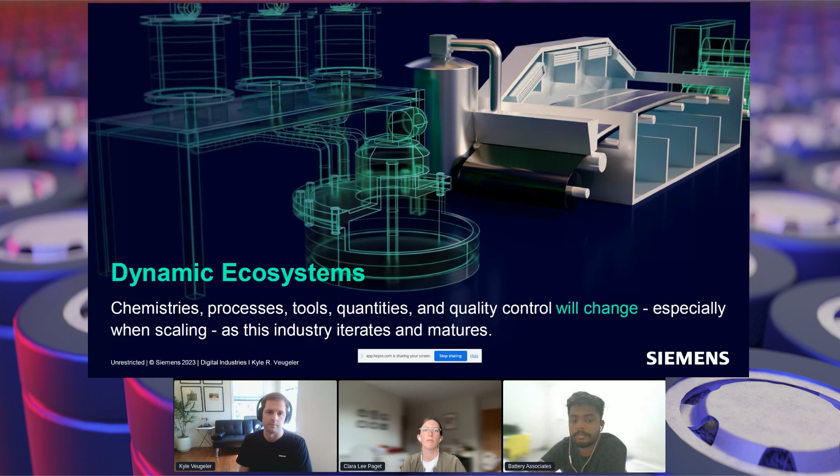First, I want to talk about dynamic ecosystems. The one thing to note is things will change. On my deployments of cell manufacturing lines, I've gone through many, many recipes, many chemistries on what that looks like and what it needs to accommodate. And I don't see that changing for the foreseeable future in the near term. So how can you handle that? That will be an important hallmark of what we'll talk about today.

The number one thing in terms of stressors on your manufacturing engineers and your commissioning team is going to be the rapid scaling of a lot of brilliant people putting together a process, maybe a PhD holder, 20 people. It is a great process. Turning that and getting funding over the next 2 years into a massive, highly orchestrated workforce is incredibly difficult.

With this multi-sourcing of tooling, I have yet to find one person or one company that can supply every single tool in cell manufacturing. You will be working with many different stakeholders, many different automation platforms, and getting them to play together is honestly an art form in and of itself.

Second with that is scale-up issues. So being able to simulate virtually or doing certain, we'll call engineering tactics ahead of time, is far more beneficial than we're just going to run this machine at different speeds, different rates, different deposit factors, and find out what our optimal cycle time or optimal rate is. Being able to do that is incredibly important, especially with an electrode.

On anode, not so much. Graphite's pretty cheap. When you come to lithium, you're scrapping material that's quite expensive, and being able to do this is great for your OpEx and CapEx expenditures moving forward.

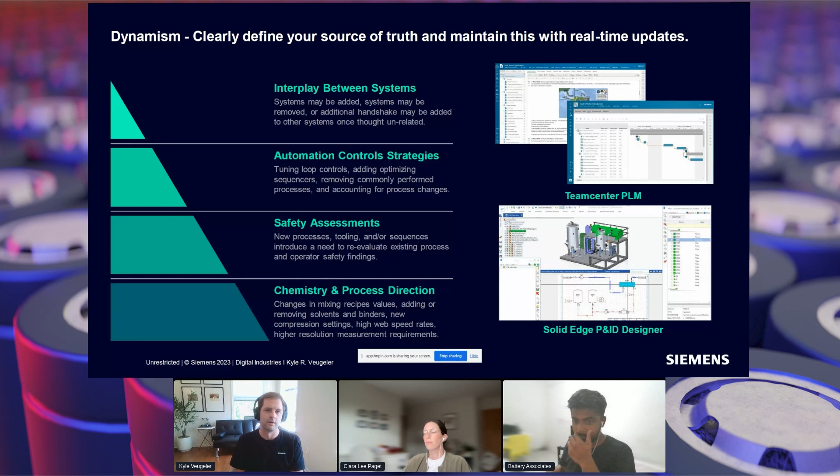But being able to have a product lifecycle management tool to document, these are my throughput rates, this is my control narrative, this is my overall design for my system and my process and instrumentation diagram. Without this, it is an act of masochism, if you will. You have to have your teams work together off a single source of truth. That's what I want to drive home here. And this is how I want to depict that.

Typically what you will see is most people talk about agile, and being able to do agile development of these systems, most teams just skip steps. That's how they actually create agile systems. In order to effectively do this without just skipping steps, you need your engineers or all your key stakeholders working on the deployment of that pilot line, mass production line, to work directly with your lab or your early process engineering teams.

Without that, which I draw over here, is the waterfall telephone game. It will take too long with all these changes to come to you to be able to react in most cases. You're already 2 versions behind by the time it gets to you. Being a tight-knit team, specifically for a controls engineer, you become best friends with process engineering, with your lab output of what they're doing on the coin cell validation,

how that might affect you. And then as an effective controls engineer, knowing, okay, they're removing the binder, therefore I'm turning off all these different systems and I have to change all my routing. How's that going to affect my quality metrics? I have to turn off a bunch of alarms. How do I properly display that on the UI for operations and seeing their feedback, as well as turning off systems with facility that we no longer need to hold up a process if it's not operational?

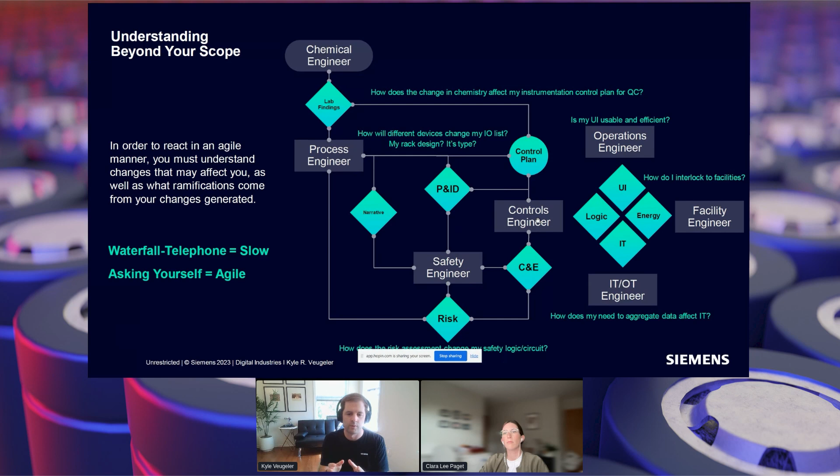That is the number one thing you have to instill upon your workforce: being very collaborative, single source of truth, know what is coming from above them, as well as their decisions and the ramifications created from those teams.

Here, I'm going to skip over it for the sake of time, but these are some of the key stakeholders you'll see on these manufacturing deployments, and they all tend to work straight from what's coming out of the lab. What are the core quality metrics? What is the core process or throughput rate? What are the safety concerns involved with this automation?

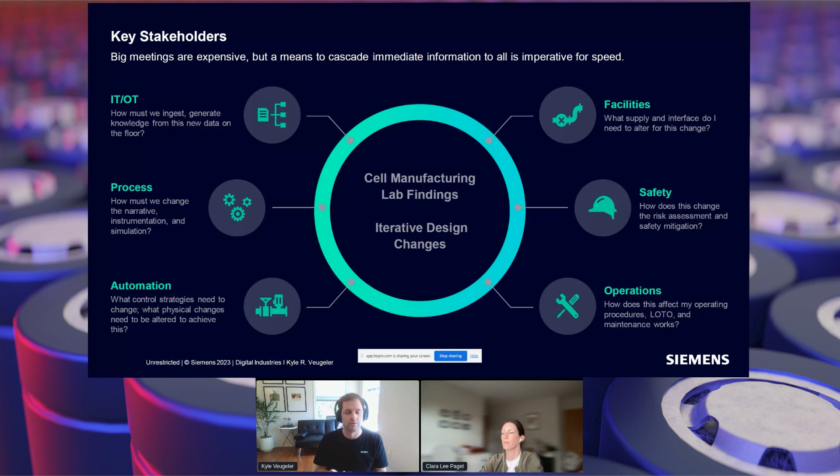Here I want to draw a depiction for what this looks like in reality. In most cases, people tend to view battery manufacturing as these individual tools on the floor. Yes, they have safety. Yes, they need to talk together to have a highly efficient system, but they're also extremely reliant on upstream, we'll call it the old adage of facilities automation.

An example of this, in mixing, for example, when you have a dry process or pre-slurry wet process, you are moving almost explosive dusts with a vacuum or a system here, and having an aspiration system that's typically controlled by facilities is incredibly important. You're not going to move that material unless you have an okay or a good to go from dust collection systems, aspiration systems.

On the contrary to that, you might have chilled water. If you're doing a massive mixer, you might need to cool the jacket of that mixer. And if you don't have the proper temperature of that water, yes, it's a bad batch, but you're not going to hurt anyone.

To turn that again on itself, when you're doing coating, you might have a defoaming agent or a solvent recovery system that has maybe an ammonia abatement system. You need to work with facilities to make sure that the damper for that abatement system is open. You cannot run that machine without that.

So controls and manufacturing automation engineers in general: high integration with the process team, high integration with your facilities automation team, commonly overlooked. And then the last one is something like fire suppression. You're not going to charge and discharge without active fire suppression in your formation and aging rooms.

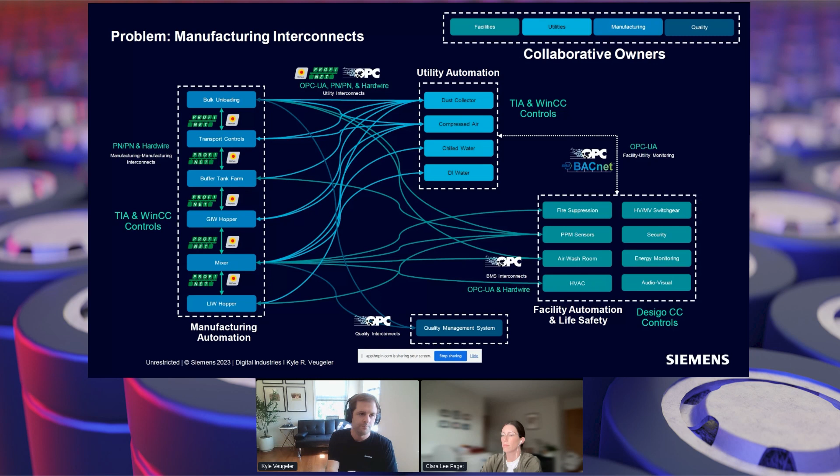I want to talk about next aggressive ramping and scaling and what that looks like in practice. Most of you may already know this or intuit this just by your understanding of the industry, but I want to drive a few things home.

So in a pilot line, typically your automation scope is a factor of 12, 20 less than what you would see for mass production. You are incredibly reliant on an OEM tool builder because you don't know what you don't know just yet. Unless you're extremely vertically integrated and somehow you've already done this without doing it the first time, you will be very reliant on your OEM tool builders, their best practices, their quality metrics, their preferred software automation of their tooling. Your process definition is in the early stages of, yes, we think this is our optimal process, but you are about to learn far more.

Tool interconnectedness, you can manually transfer material on a small sub 1 gigawatt facility. When you get to mass production, that really gets upended. And they don't really need to talk to each other. You're still in a pilot line. The data throughput, yes, you're doing quality metrics, but you're not doing massive data ingestion at this point in time.

And then also time to commission, you're learning the first time how to commission these systems. Some of these might be, I don't know, we'll call it 10 meters tall, 100 meters long. With this, you don't just FAT this at a customer site and build it and ship it here. You tend to stick build them in some cases, especially in electrode for these massive machines.

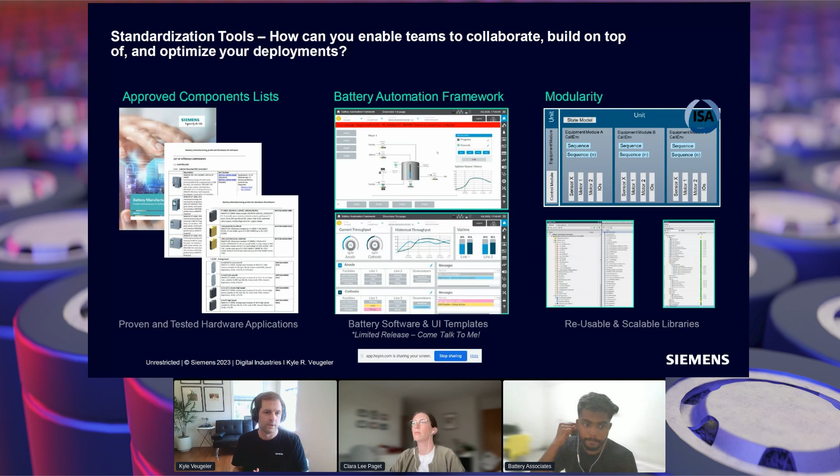Using modularity in your code development is really big in terms of, I want to do 1 gigawatt, I'm going to expand to 10 and then to 100. All of that capital investment you're laying down, you want to be able to reuse that and iterate upon it and build upon it. So how can you do your software development in a modular fashion to not reinvent the wheel for every production line?

Within Siemens, extensive understanding of those. So like I said here, we have Opcenter, PLM, IoT. The list goes on for preventative maintenance and operations and manufacturing. Simulation, I'll touch upon in a second. A really big help in going from pilot to mass production, and a plethora of use cases that we can share that are non-NDA constrained. Templates for doing your due diligence ahead of time, templates for selecting the right hardware, doing your simulations, and then also in terms of connecting multiple different platforms to one aggregation system.

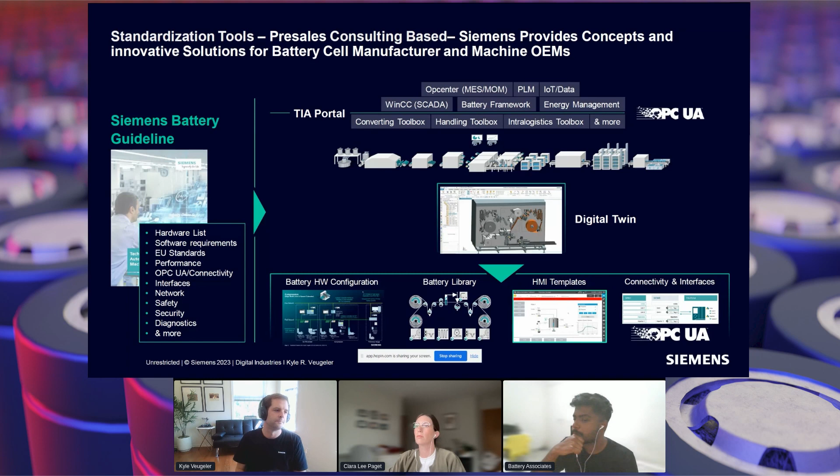I want to show you an example of maybe what modularity would look like in practice. So here is an extremely brief 10,000 foot view of what you might see in mixing, for example. You might see a PLC, you have some motion control, you have some load cells for your gain-in-weight, loss-in-weight into a dosing system or to a mixer. You also have a lot of process automation when it comes to that world, high analog, less digital.

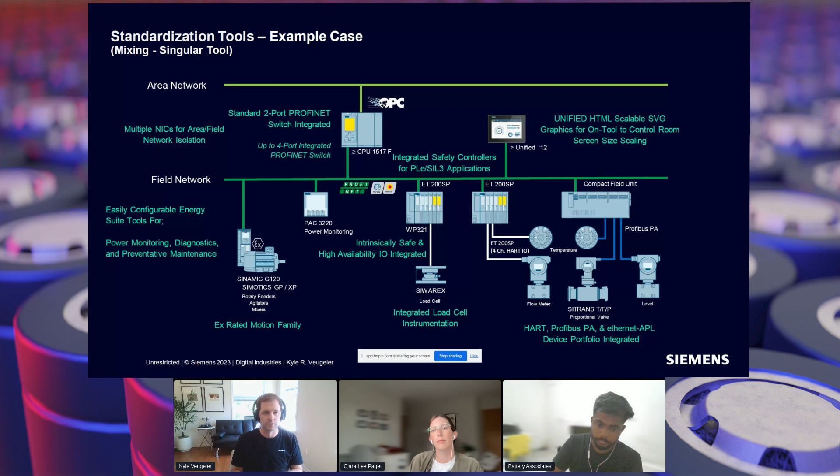The one thing to note here is a tool provider might only provide mixing, they might not provide coating. And then even if they do provide mixing, having a monolithic structure is a very big detriment, because if you want to service a portion of this or run a portion of it without the other portion, it's really good to know about hot swappable I/O, your span of control for your PLCs, and the modular nature for what you can reuse and use. And I'll show you more in a second on that.

The big thing right now, it is very hard to walk the walk and talk the talk on this, but people doing it are seeing massive dividends on what their work looks like. The modular production aspect.

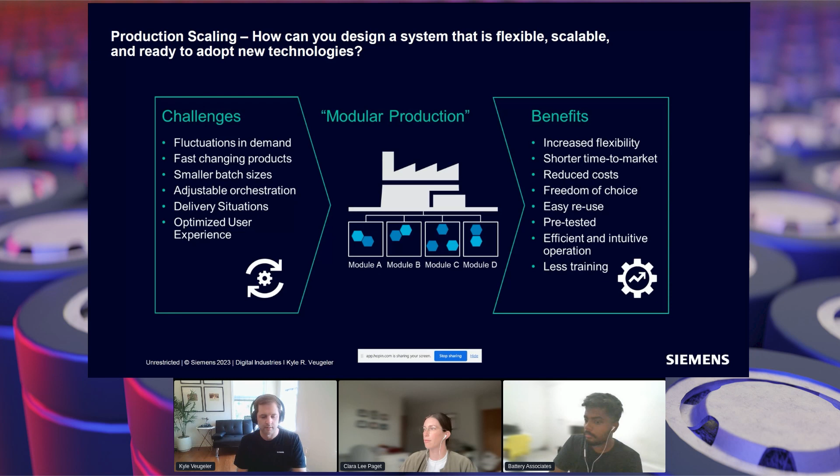Now, how does this help everyone in the industry? One, for manufacturers, it is really good to be able to have a modular system for A/B testing, for scaling for the future. Like, yes, this system worked, this system didn't. Go with this one. We're going to move that on. It's not one system tied together that you have to redesign.

Second, for line integrators, if you have multiple different platforms, multiple different parts of the world, how do you break them up in a modular fashion to interchange and swap them out? Also, for the end customer, it is a big help in terms of quick adaptation for changes on the floor. You can change a certain portion of your system, not rewrite a bunch of code for massive monolithic structures.

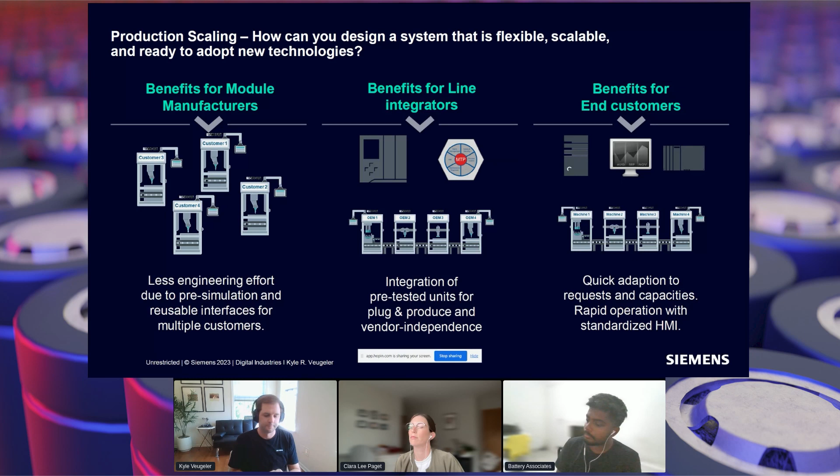Now, what does this look like in practice? This is what it would look like. So this is a subset of modular breakdown into mixing. You would see something like batch handling be on a separate control strategy from your mixer. The reason that it's helpful is you might have a new mixer one day, and I'll speak to this in a second, or you want to do maintenance on a mixer. You want to still be able to run production on your upstream.

You can take down one system, let maintenance do whatever you want, deploy new code. You're only affecting a portion of your operation. And being able to have multiple different control systems allows you to do that. If it's one, you're going to turn off, lock out, and the whole thing is down. You're sitting there waiting for them to apply them. Also, when you want to make a change on automation for mixing, you don't really want to expose risk to your upstream process that's been running really good.

As you start to scale, this becomes far more valuable. And what I mean by that is, based on my alma mater, when I would go into mass production, you will find the limiting factor of what OEM tool builders can build in a singular year. You're not buying one mixer, you're buying 90 mixers, and they're huge. They're 1,000 horsepower plus, 90 mixers.

You will find quickly that being able to adapt to 7 different suppliers to build you the exact same tool is incredibly hard. So having a modular code you can give them as a reference, or being able to own that within your own organization to say, give us the hardware, we'll write the software because we have to talk to everyone, that is a massive leg up when it comes to mass production adoption. Being able to source from multiple vendors to deliver the same tool because they can only build so many a year is a common, almost on every tool, problem that you're going to be seeing in the near future.

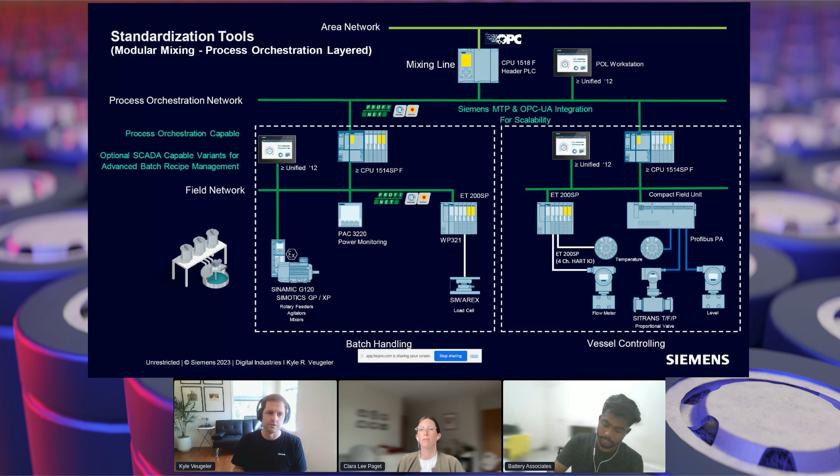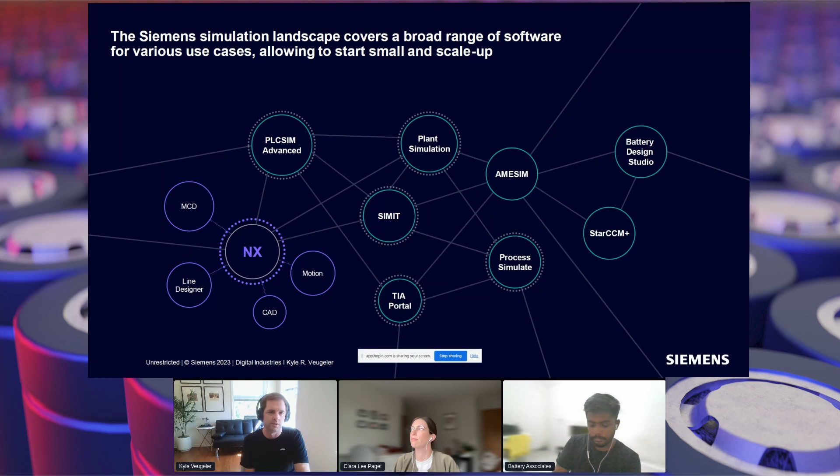Next, I want to talk about simulation real quick before we tie this up. I won't speak too much to this because this is a PDF and you can't see the fancy videos, but it's incredibly important for understanding what pilot to mass looks like for your roadmap. So within Siemens, we have a litany of software and simulation capabilities. I want to draw your attention to a few, and forgive me, you can't see all the fancy moving bits of this slide deck.

In mixing, you may see you need to do, we'll call it high speed vibration tests, and maybe why the blades on your mixer are vibrating and how can we effectively run this. You might just need to look at distribution within the mixer. Being able to simulate this is incredibly important.

As you step forward into coating, being able to coat and then check with maybe a thickness gauge on your web is great. Being able to simulate this with multi-physics ahead of time will save you massive amounts of lithium scrap as you run. You're not doing trials and measuring with closed loop control. You're actually virtually doing this with no cost to material or scrap rates as you ramp.

Same thing with calendering. That is a big portion of quality in cell manufacturing. Maintaining your electrode thickness, being able to simulate down to the actual particle physics of these systems, Siemens has done and will continue to do to support systems here.

As you get into more complex aspects of these systems, discrete element modeling, laminar resolve modeling, and slurry modeling, these become incredibly important for throughput calculations, incredibly important for why is my machine not running the way it's designed to, as well as simple changes like the moisture within a room will affect the particle physics of the powder or a slurry moving through a system. It might aggregate on the walls and kind of just go right through the middle. Being able to simulate your limiting factors and what can and cannot be done, very important.

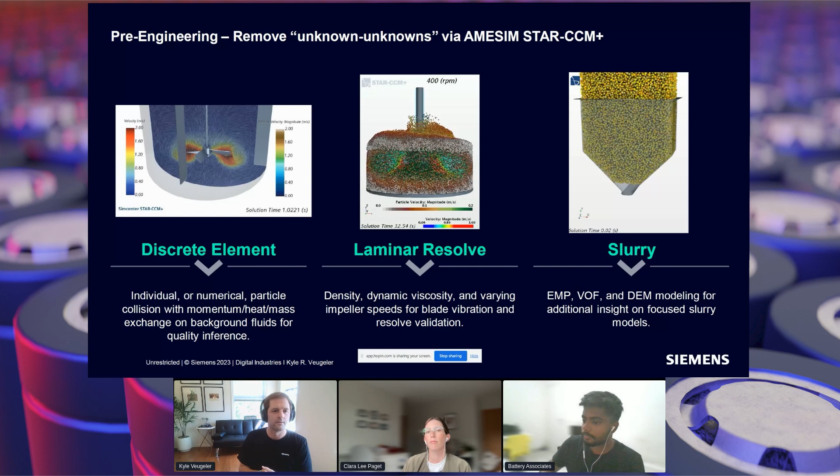The last one here, you really can't see too much because it's not an animation. After this, hopefully I can share my PowerPoint so you guys can all see this.

Being able to virtually simulate within Siemens your PLC runtime, your user interface, and then also its feedback for the simulation event, incredibly helpful. Yes, it is a lot of work to set up in the very beginning. I won't deny that. It is incredibly helpful for tool builders to do a virtual buy-off. Does my safety system work the way it is before a customer comes on site to buy my machine? Being able to see, if I add 10 more pallets to my line, what is my new throughput limiter? Where's my bottleneck now? Within Siemens, the capability tied directly to your PLC control environment to emulate a PLC, to emulate the multi-physics, to emulate the cause and effect responses, incredibly helpful.

The last thing you want to do is have 10 engineers from an end customer standing on your floor to do a buy-off. You could have done that ahead of time. They're just going to tear you apart for nitpicky labels and colors and things like this on your tool. Being able to do this, incredibly helpful.

Kyle, actually, 2 more minutes to conclude. Sorry to disturb you.

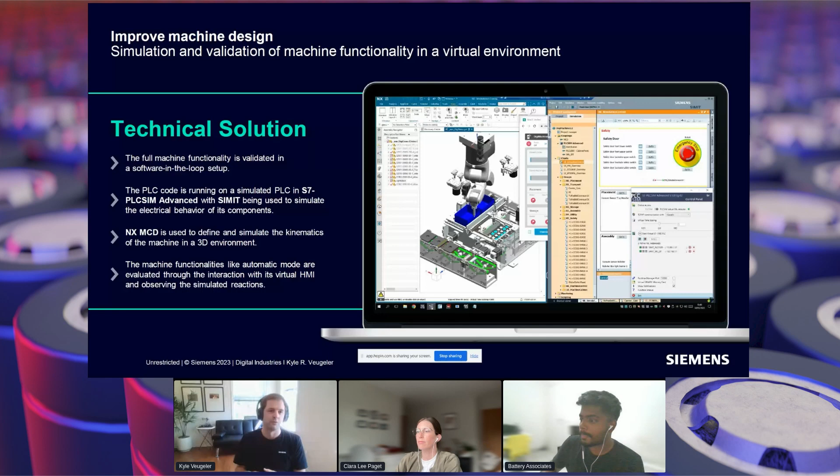Especially as you integrate this together, you need to know how they're going to be working together in real life instead of learning that on the floor, which I've done. It's not fun. This is one thing I wish I had about 4 years ago. With this, you can't see the animations as well.

Being able to, in the web handling portion of cell manufacturing, alter your dynamics for web handling, incredibly important as well. Tension is the name of the game, web alignment is the name of the game, and limit defects, name of the game. Being able to move those different servos and simulate the optimal speed at which the position offset, how that affects your tension. If you're doing a dry process, you're handling an electrode without a foil, incredibly hard to validate those tensions without actually doing it in real life. Being able to simulate it now, incredibly helpful for scrap reduction and ramping.

As you go into the wet process, still very important, still incredibly important for optimizing cycle time. As you expand 30 times larger, 1 second is now half a minute. It's a very big deal on your output and throughput rate. Also within this, full 2D, 3D, built-in P&ID simulation capabilities within Siemens to do this. Like I said, it is incredibly important as you go to mass scale.

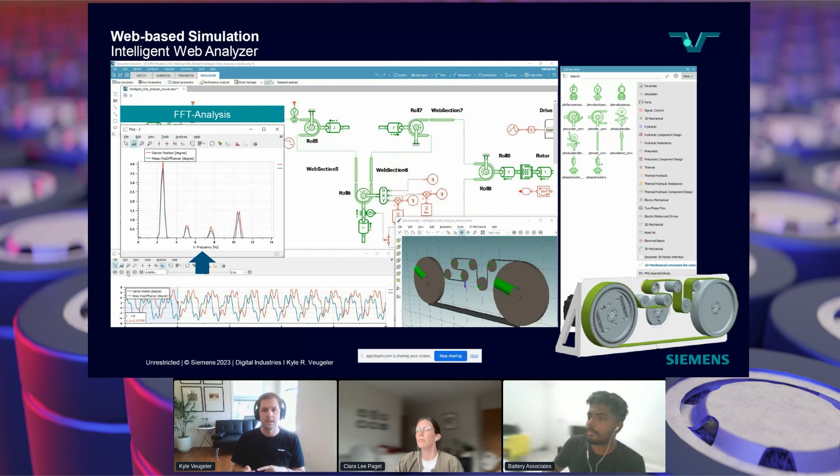Working at a pilot line speed of maybe 80 meters a minute, great. When you start to go into 500 meters a minute in high-speed dry processes, you almost don't have time to respond on the tool itself. You have to do these things virtually for marking and non-marking because the web's just gone at this point in time. Being able to simulate what that will look like in practice and does your data flow the way it needs to, incredibly highly important for your controls engineers.